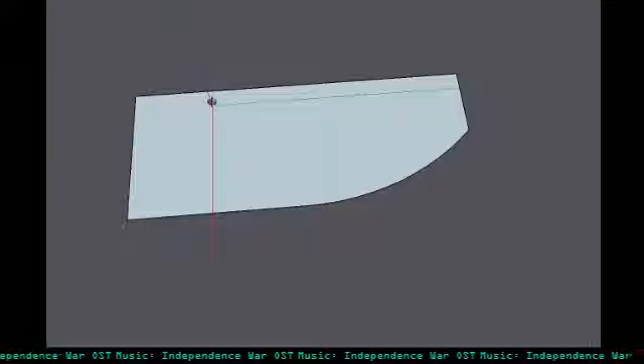Now one thing I'm gonna try to incorporate into this, and it may not fit the way my universe designs human ships, but I want to try and incorporate a little bit more of a curve with this ship. From my previous battleship model, which honestly I need to redo because it looks like a clusterfuck, there was a lot of weaponry on it with specialized turrets, like a tri-barrel plasma turret.

If you remember my flak turret, just imagine having three barrels instead of two, with a set of three on each side. The cannons were propped on the turret, and there'd be several of those turrets layered around the ship.

So I'm not sure if I'm gonna go that route, but I know for a fact the ship is gonna be relatively heavily armed. I just don't know what turrets are gonna be on it. I also have to take into account that I'm not gonna be using the dreadnought turrets, so I have to find a supplement for those.

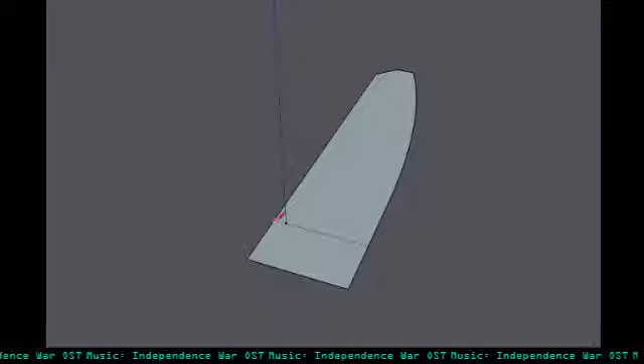I'm not sure, but I'm probably gonna use the tri-barrel turrets, and probably go into what you could call a research and development phase, and actually design some other turrets.

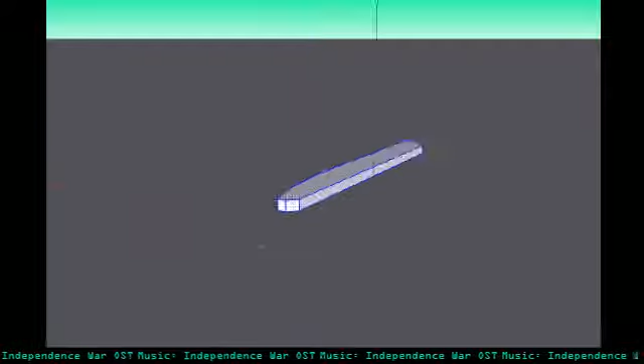So you guys will be able to view my turret modeling as well, because I know you guys didn't see... oh God, you guys didn't see when I was designing the flak turret. Actually, yeah, I did have a side screen of it, so yeah, you saw that.

Yeah, so I'm trying to probably remodel some of my old turrets as well. There's gonna be a lot of remodeling if you haven't caught on. That's mainly because a lot of my models need to be updated, since I get into more and more detail with my ships nowadays.

Oops, all right, let's see here. Let's bring this back a little bit, and let's make this a group for now.

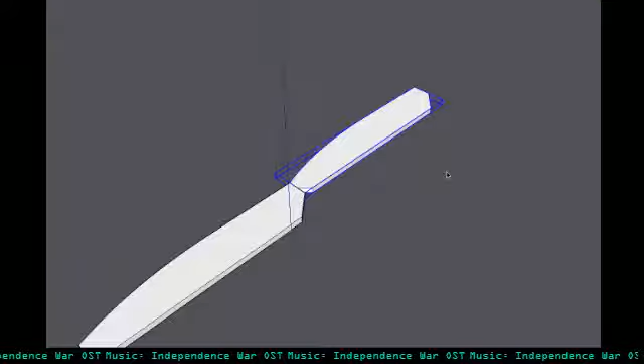One strategy I like using now, I don't know if anyone's picked up on it—actually you probably can't, because you probably think it's just me creating components. But one thing I like doing as a prototype method for certain parts of the ship is make them groups instead of full-fledged components. Because if it's a full component and it turns out you don't want it, you end up with a random list of stuff you don't use anymore in your components list.

So I make them into groups, and once I've decided this is the part I want to use, I'll explode the group. I move the part away from any other faces, explode it, make it a component, and then go on from there.

Hmm, I don't like the way this is going. See, so let me take this out—oops, not added the group. I'll just delete it altogether. Let's see here, how am I gonna do this? Let's see if I can bring up some more inspiration and get a generalized idea.

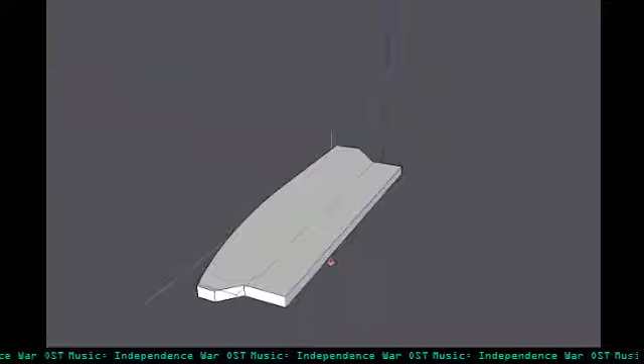One thing I'm also trying to do is get away from the hexagonal type structures of the ships. What I mean is, if you look at the Pillar of Autumn and some of my cruiser type ships, and of course my frigate ships are always influenced by Halo. The Pillar of Autumn's superstructure was hexagonal, which added to its support and overall durability in fights, especially against the Covenant. That made it a really interesting ship, so I liked making my cruisers either similar to the Pillar of Autumn, or similar to the Marathon class cruisers.

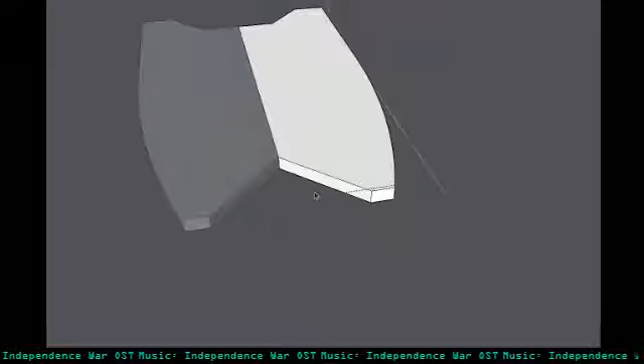Later on I started modeling and using influences from the Valiant and the super carriers - I think it was, not the Everest, that's Mass Effect, but the Trafalgar, I think that's how you pronounce it, don't quote me on that, I'm not too good with the name. But stuff like that, and I'm trying to get away from that, add a little more flavor to the ships and see where that goes.

That's one of the downsides to having components - it doesn't update, so you can't get a full spectrum of what the parts are gonna look like until you either copy and mirror it, or you do it on the other component. So this has its ups and downs.

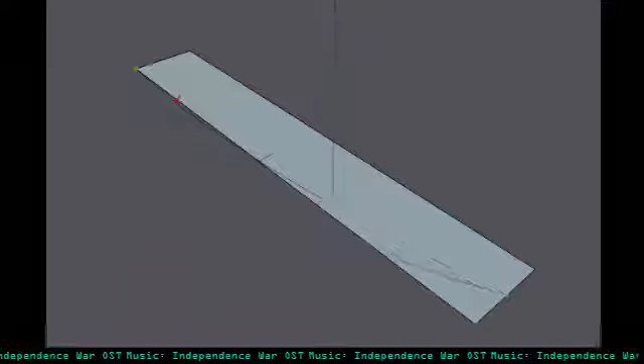So I'm just gonna get rid of this concept altogether, and then what I'll do is this. Okay, let's delete that. Yeah, I like that better. And then we'll do this and cut that off, make it a little bit angular there. Cut this off. And then we'll go ahead and make this a group just to see where this is gonna go.